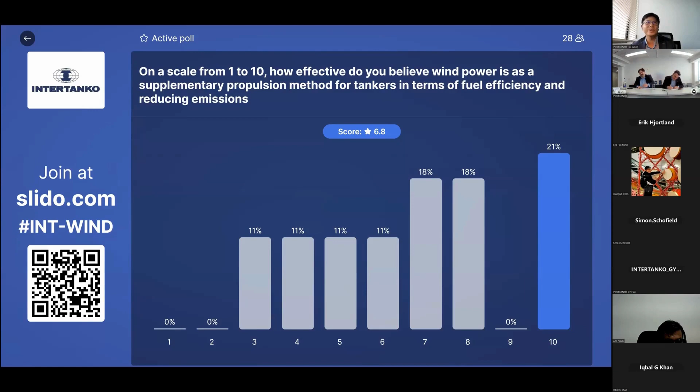Okay, can you hear me, Casey? Yes, I can hear you. I hope the rest of the audience can hear you as well. If not, I think they can sound out on the chat box.

Yeah, thanks. Fantastic. Thank you very much. And some interesting survey questions and answers there. I'm actually going to link those maybe with a couple of the slides later in my presentation.

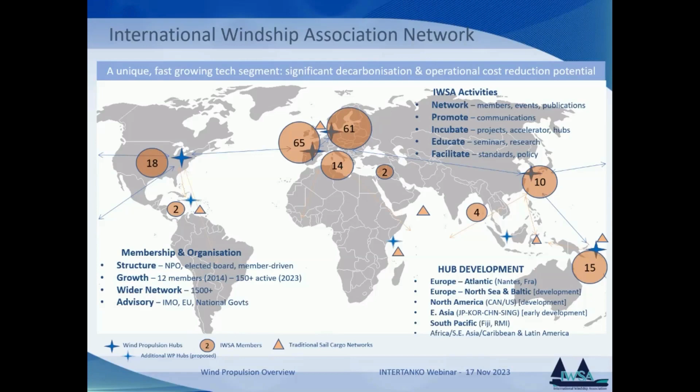We have a very active hub in France. We've just announced a hub in the Pacific as well, based on the Marshall Islands. And we've got developments also in North America and in Asia.

Very quickly, what does wind power deliver? What are we actually talking about here? Well, as an energy source, we're talking about zero emissions. That means obviously with wind, you don't need to mine it, refine it, transport it, store it, or bunker it. It's zero emissions delivered to the point of use on the vessel at a zero cost for the lifetime, not just of the vessel, but of the system itself.

Now, of course, the wind propulsion technology itself is not free. There are costs involved there. But I've put a few zeros here: zero development time. What that really means is we have 13 companies with their systems in the market now. Some of them are more developed with 5 to 10 installations.

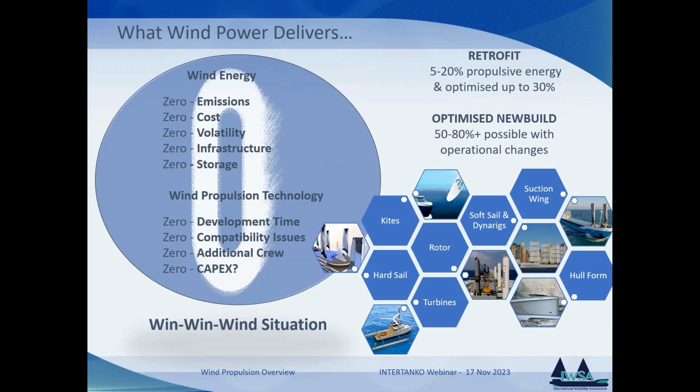And then we have hull forms where the actual hull is being designed as a giant wing itself, which is a very exciting development, and turbines, which can generate electricity but also deliver some thrust as well.

Now, our approach, and we'll hear more from other speakers about this, is to look at the whole energy system as a pie chart with five segments, each around 20%. Wind delivers 20% across the fleet. Then there's the activity of the vessel, operational changes, optimization of voyages, etc. Then the vessel itself, optimizing it, so air lubrication, integrating the EMS, etc. Each of those segments could deliver up to 20% or more, potentially more.

And then filling the fourth segment with the eco-fuels we hear so much about. And then a fifth segment, which could be any combination of those. But moving away from a fuel-centric approach, looking at it very much from an energy-centric approach.

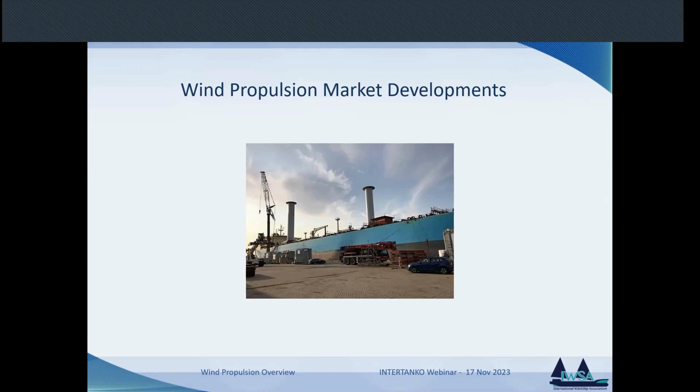Now, wind propulsion market developments. This is a Maersk tanker that was outfitted in 2018 with a couple of Flettner rotors. Currently, we have 31 installations on vessels, and as you'll see, the largest segments are ro-ro, bulk carrier, and general cargo.

There are 3 tankers in operation, but if we add wind-ready vessels, actually 6 chemical tankers were delivered this year, designated as wind-ready for Capital Ship Management in Greece. This is a growing trend, which I'll maybe touch on at the end.

Now, looking out to the end of this year, or probably the end of Q1 2024, we're looking at around 49 to 53 installations, and the 65 in brackets is the wind-ready aspect as well.

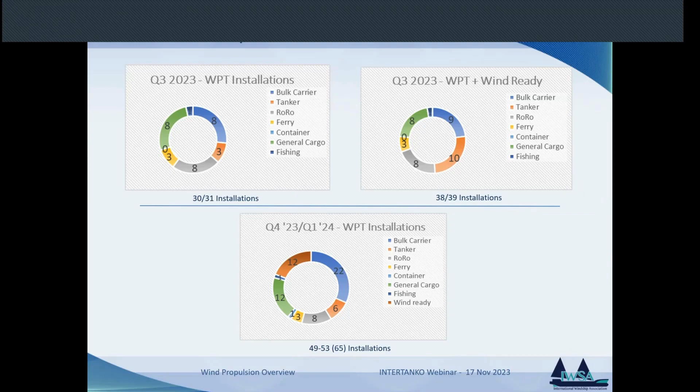So we started the year at 23. We will be doubling that this year, but actually there were 8 installations of wind propulsion last year. There are 24 plus this year. So we could say there's a 300% increase there.

This is a breakdown of what systems are on what types of ship. The pictures on the left, I'm not going to go through this because I don't have enough time, but 2 of those are Chinese tankers already installed. Others are simulations, but all of these are on order.

We actually have, I think, an order book for '24-'25 new builds of 11 tankers. Of course, retrofits are increasingly easier to do as we're moving along the learning curve, so from the announcement of an installation through to the actual installation is coming down to months rather than the best part of a year.

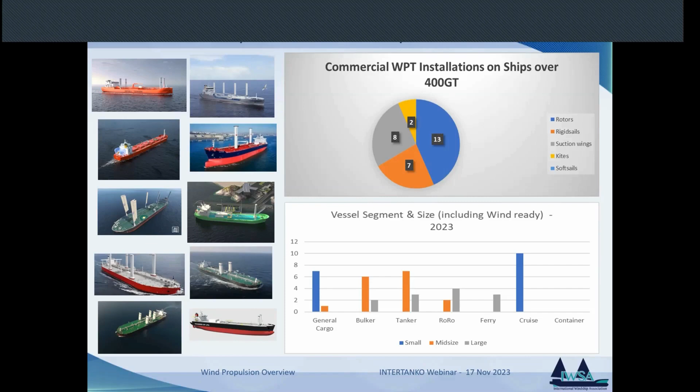And indeed, the foundation plate, if you're putting foundations on for, say, a Flettner rotor, it's a couple of weeks of work, but the actual installation, the last one I saw was 5 hours. So a ferry came in, had the installation put on, and 5 hours later she was back out to sea, fully loaded, with the rotor in operation.

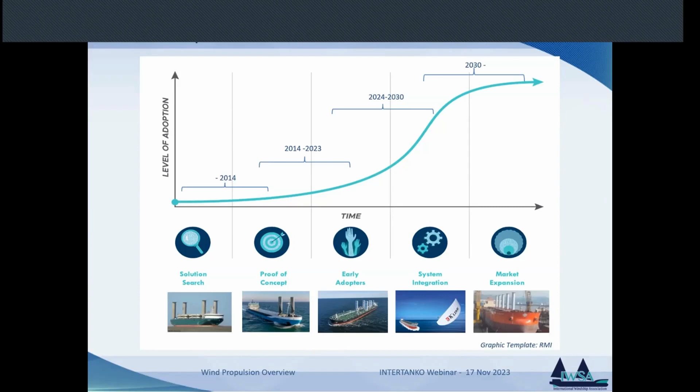This is just touching on where we are in the development curve. I think everybody's seen these kind of S-curves around innovation. We're pretty much in that area of early adopters, but moving towards more system integration, where we're getting a lot more development, a lot more installations. Feedback from those demonstrator vessels is now helping us integrate those systems into the ships.

Now, this ship, just to give you a quick heads up, is a ro-ro launched earlier this year with four wing sails. She's delivering the Ariane rocket parts from France over to French Guiana.

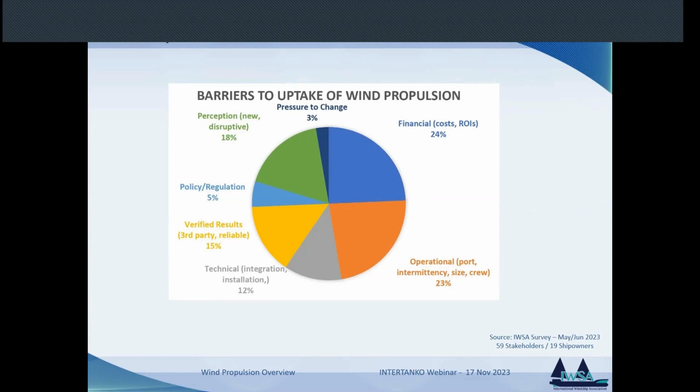Some barriers to uptake - I think this probably reflects some of the results we saw from your survey at the beginning. The financial issue, ROIs, costs, etc., obviously bottom line issues, but also operational aspects, including the intermittency of wind. Indeed, that's being challenged, and we'll hear a lot more about that from other speakers around wind routing, etc. But also the crew safety issues as well.

Market forecast - just coming to the last few slides. Just to give you an idea, this is the policy pathway, and the 3 flags are the indicative checkpoints passed in MEPC 80, and then the final net zero around 2050 or so. Now, none of the policy instruments is actually strong enough to decarbonize by itself, but collectively they're creating a lot of pressure on the industry, as I'm sure you're all aware. Collectively, this says we have to go towards zero emissions, and move far quicker than we are now.

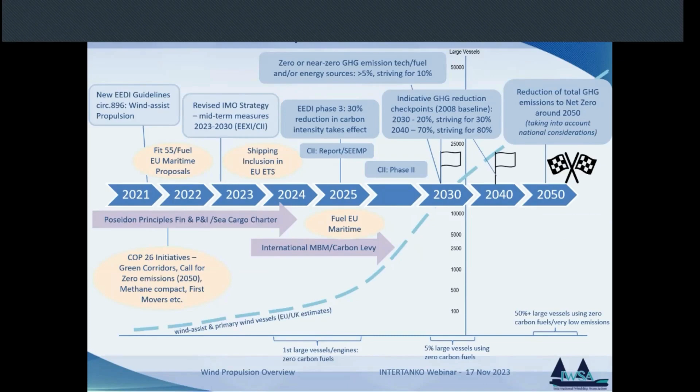Of course, wind propulsion is a zero emissions source, so whatever else you're deciding, you can use wind. The dotted line through the middle is a combination of forecasts made by the EU in 2017, followed up by the UK government in 2019. The EU estimated up to 10,700 installations, primarily looking at bulkers, tankers, and container ships. We think that's quite conservative because Ro-Ro's and general cargo weren't included. The UK government then took that out to 2050 and estimated between 40 to 45% of the global fleet would have some form of wind on board.

Finally, just a very quick look at the trends - it's always a bit of a chicken and egg situation. The trends develop as we get more wind propulsion systems on ships, but we need the trends to be developing to get more propulsion systems on the ships. Wind routing, which I've mentioned already, is increasingly sophisticated - for maintaining your ETAs, you can plug into these systems. If you want to maintain your ETA, what is your best route? If you want to maybe reduce your ETA, maybe by 20%, you can get far more substantial amounts of wind power for the ship. These are based on 50, 60 years of meteorological data, increasingly accurate.

For optimization, we're looking at things like satellite forecasting, sensors on all of the systems. Even LiDAR is being investigated, which is used on wind turbines, to map out about 20 kilometers away from the ship, what is the shape of the wind coming in. So these are ways to optimize, and there's going to be a lot more development there.

Scaling production - a number of our members are already moving production over to China. We've got scaling going on in Europe as well, and I think we're over 1,000 units per year capacity across the entire association. But for smaller units, that's easier to build - larger units are going to take more time. I mentioned wind ready, I think I've mentioned containerized - actually, there'll be a chem ship. Chem ship will have 2 containerized wind systems installed on one of their ships at the end of this year.

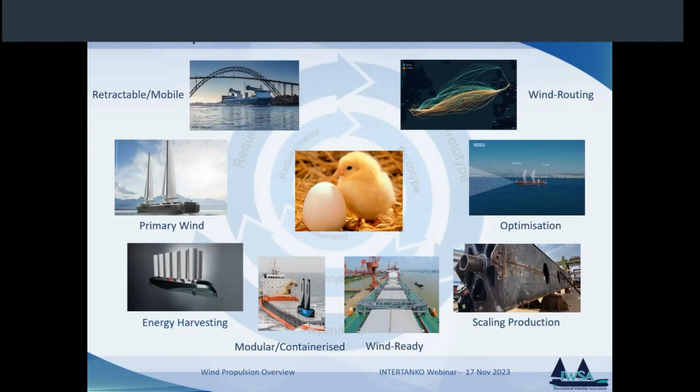So we're starting to look at a new paradigm of actually generating not just the fuel you need on the ship, but also a cargo. And that really starts to unlock some interesting business models. You'll see on the right side, that should be in operation.

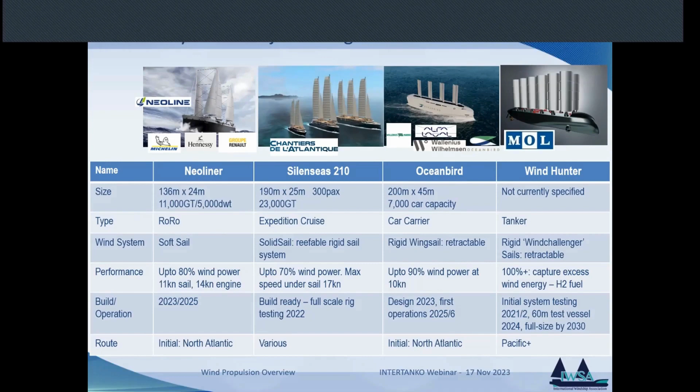That one, the full-size one, by 2030, hopefully earlier. But there are a number of other primary wind vessels in design. The one on the left, the Neoliner, is already in production in Turkey, and the other two are coming online 2025-26. This is my final slide.

We like to call this a win-win-win situation. All of the companies listed here, and I could have probably introduced another 3 or 4 slides, all of them are involved with wind propulsion projects, either installations, testing, certification, or actually some of them are even producing their own systems themselves. So thank you very much.

Thank you, Gavin, for bringing us through a very good introduction on the landscape of how wind power assist technologies have evolved and been applied, and what's to come. I think without further ado, we will have Mr. Frederick Gerhardt of Rise Maritime to bring us through a tanker technology overview.

Thanks. Yes, thanks very much for introducing me. Can you hear me, Casey? Yes, I can hear you. I think the audience can as well.

Okay, good. Gavin mentioned that the number of wind installations will explode over the coming year. So explosions are also the topic of my talk today. This is what I'll try to go into a little bit here.

Since a few years back, we also have a wind propulsion lab, so we've worked a lot on wind powered ships. Now wind power - did we not hear this before, and did it not end this way, like shown here in the picture? But as Gavin explained, we're talking about modern systems. We're not talking about square riggers and the canvas sails of the Temeraire.

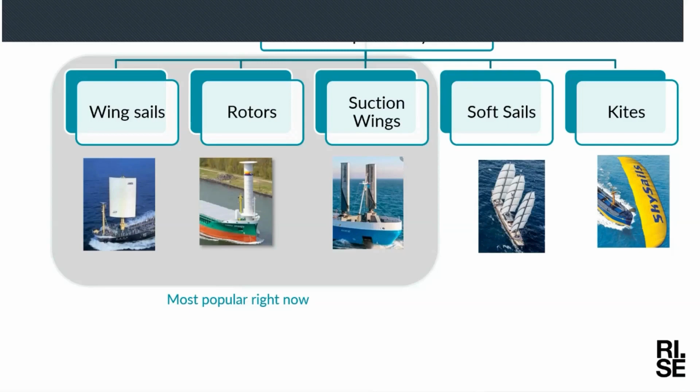We're talking about basically 7 categories, of which I've taken the 5 more important ones here. The 3 main categories with most installations right now are the wing sails, the hard sails, the rotors, and the suction wings. I thought I'd give you a 30-second lecture in fluid dynamics because they all work the same way - they are wings producing lift and drag, like wings on an aircraft.

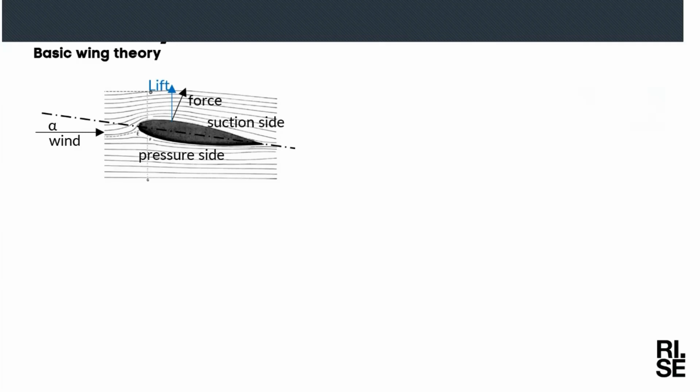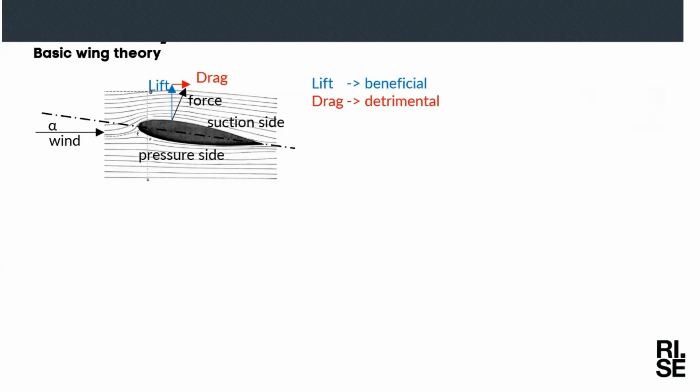So they produce lift, that's a good thing. They produce drag in the direction of the wind, which you don't want. If you increase the angle of attack - that is the angle between the direction of the incoming wind and the wing - then you start producing more and more lift until you finally reach something called stall. This is where the flow can't follow the shape of the airfoil anymore, it starts to separate, and this is something you don't want, because after this your beneficial lift will just drop.

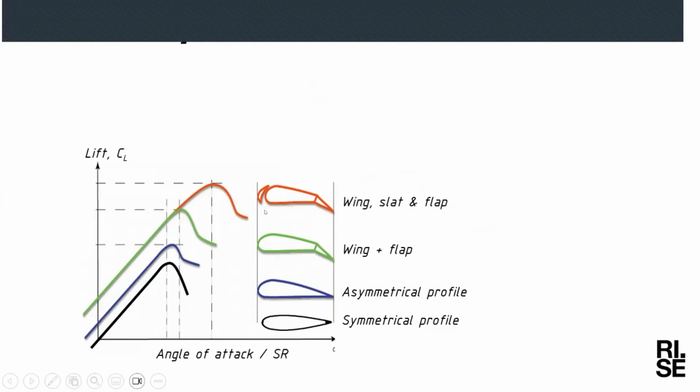So the big question is, how can you avoid this? How can you delay the stall as far as possible so that you produce as much beneficial lift as you can? There are a few techniques around this. Flaps are used on every commercial aircraft - if you look out the window just before landing, you see flaps and slats extended, and they give you a little bit of extra lift. But there are other, more advanced techniques - this here is called boundary layer suction.

So you've got a very fat profile in the beginning, and normally the flow would separate somewhere around here because it can't follow the curvature. The boundary layer, that's the innermost layer of fluid, can't cling to the wall anymore. It doesn't follow the contour, and then it separates.

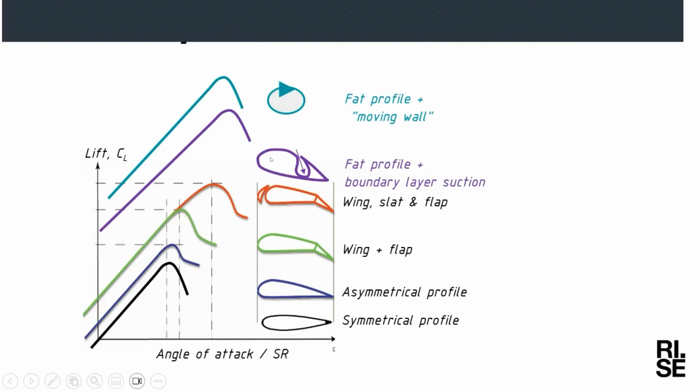But if you just suck off this boundary layer, your streamlines will look nice again, and you get a lot of extra lift. There's other ideas. Instead of sucking off the boundary layer, you could help a little bit by rotating the wall, and you see where this is going.

This is basically the physical principle behind those three most common systems. Something to mention here is that the two top systems, the purple one and the moving wall rotor thing, are active systems, so they require energy to operate. This is something you need to keep in mind when you do the overall energy balance of your systems.

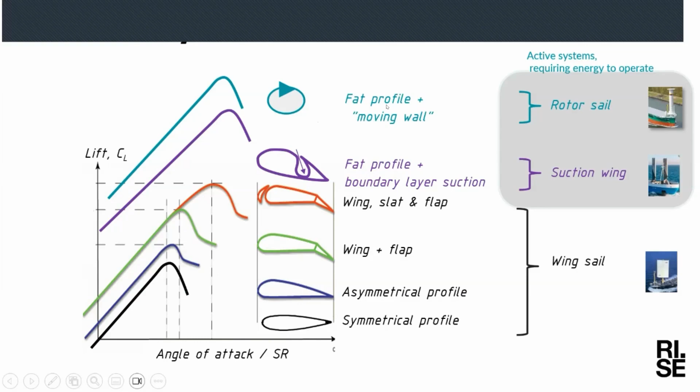Now you will probably ask yourself which of these systems is best. The problem is there's no simple answer. It depends on a lot of factors, for example the routes, how close to the wind you want to sail, and a lot of other factors. You can consider all of them, and what it finally boils down to is really what system gives you the most bang for the buck, the best return on investment.

Talking of the benefits of the systems, the bang they can score in three areas really: wind propulsion can help you with rules, with EEDI, EEXI compliance, with the ETS, CII, IMO regulations. So that's rules, but they can also produce real savings in terms of fuel, money, or CO2. Another area that's becoming increasingly important is consumer expectations. It's kind of an image question - it's really nice to be able to provide green transport.

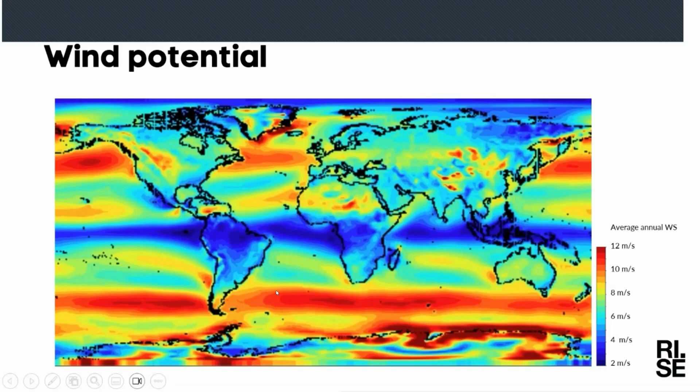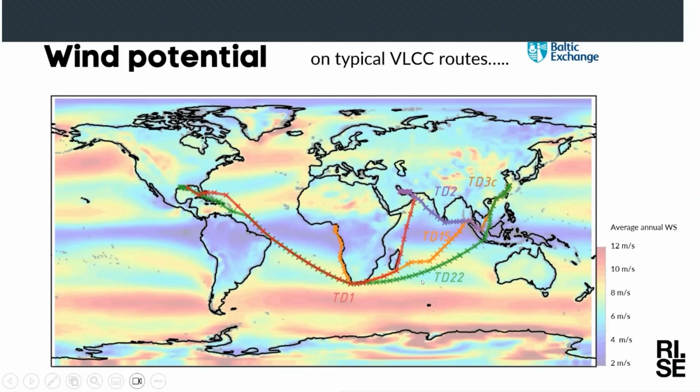If we talk about tankers, and maybe above all oil tankers, VLCCs, which I'm looking into in a minute, you see a concern - maybe it's not so much of a problem, but some of the routes, like Persian Gulf to Singapore for example, are in not very good areas, so the wind speed potential is not very high. There are other routes like Gulf of Mexico to China which actually have a large potential. But you need to look at this case by case, and then tankers, VLCCs, operate on the spot market, which adds complexity to those predictions.

This is a case study which I wanted to present to you today. It's a European Union funded Horizon project called Optiwise, where we as RISE work together with Euronav and the sail provider. We looked at the energy saving potential of installing wing sails on a VLCC.

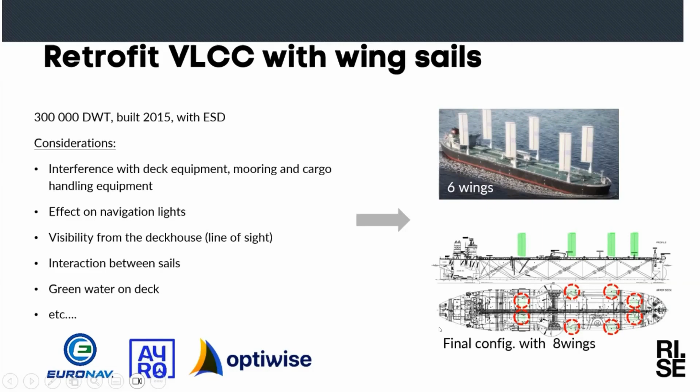So we sat down together with Euronav, looked at installations, how many wings we could stick onto a VLCC taking into account interference with deck equipment, all the pipings, cranes, and so on. In the end, we figured out that we could really stick up to 8 wing sails on a ship like this. So we took this further and looked at energy saving potential and did a few routing studies.

We also looked at how it influences the EEXI. This is already a very effective ship, built in 2015 I think, with energy saving devices and so on, so it does comply with the EEXI as it is, as a motor ship. If you would stick the 8 wing sails on, you could also comply with EEDI phase 3. So that's really a good saving here. If this was a new ship and you would equip it with those 8 wings, you would also fulfill the phase 3 requirements.

As you all know, EEXI is a bit of a paper tiger. It's a dead number which ends up in a technical file somewhere and no one looks at it again.

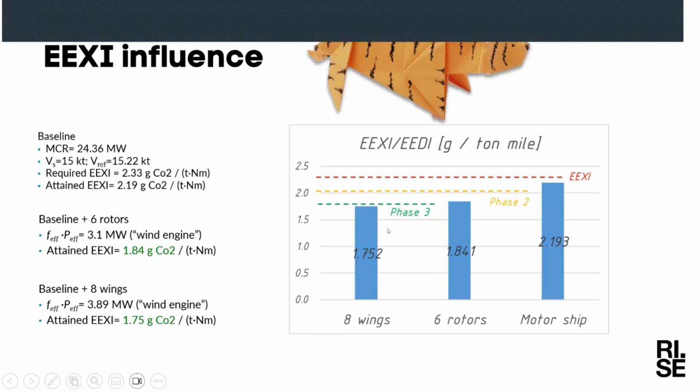If you mix those numbers for those routes together with operational data from real ships, and recreate a year of operations, you'll find that you can extend your CII rating by about 2.5 years or so by installing those wind propulsion devices.

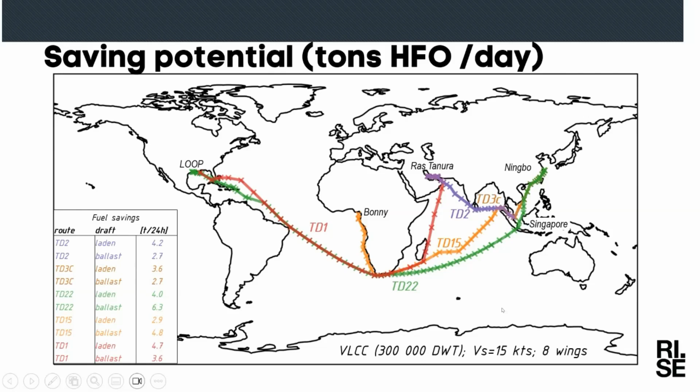So this was the benefits, the bang. The question is what about the buck? At what price do the benefits come? There's obviously CapEx and OpEx, but there's also other aspects I just wanted to shortly touch upon.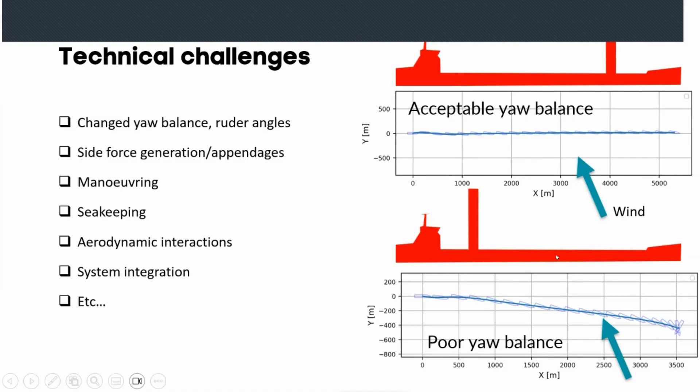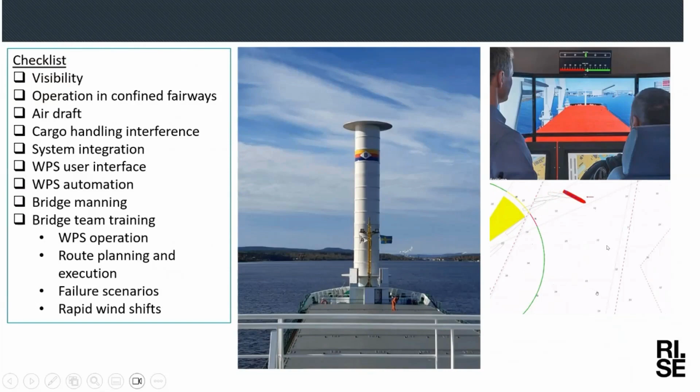There's also a whole lot of operational challenges, visibility issues, like in this picture from a sea trial. The pilots didn't like this because they couldn't see their marks in a channel. Here's a simulation of operations like a tacking maneuver in a confined fairway, so those things can be analyzed before, also for example in a simulator.

And here's a few more pictures. Sorry, can you go back again?

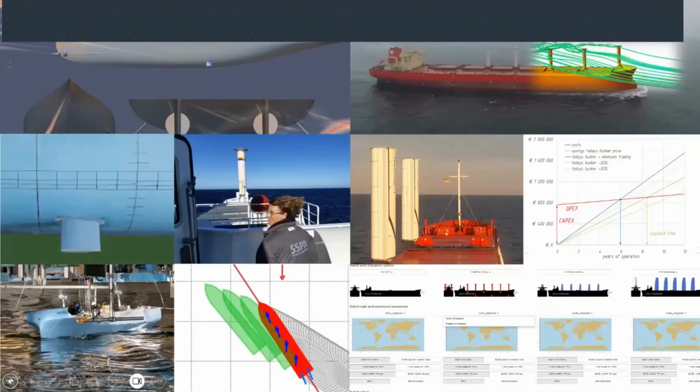Before I hand over to the next speaker, I mentioned side force generation. The sails produce side forces. You somehow need to counterbalance this, above all on more powerful installations. This is a CFD study or a tank test of a little fin like a dagger board.

There's seakeeping aspects, this is interesting. This is a sea trial of a real device, to basically confirm savings in real life.

And then the last bit, the picture down the bottom right, is our methodology to help people like Eric from Odfjell, who will be the next speaker. It's a side-by-side comparison of competing wind propulsion technologies on the same ship. You've got your baseline tanker, and you can equip it with Flettner rotors or small or big wing sails, and run it along different routes. In the end, you get the fuel savings predicted by the same system. This is what we call a level playing field to compare all the devices.

And this is actually what we've used for Odfjell at the beginning of the year. Before they decided to install suction wings on a tanker, they came to us and we ran it through this system, looked at a whole lot of other devices and device placement, number of devices, device sizes, and so on. In the end, they decided on this configuration. I think we will hear more from Eric in a minute. With this, thanks very much.

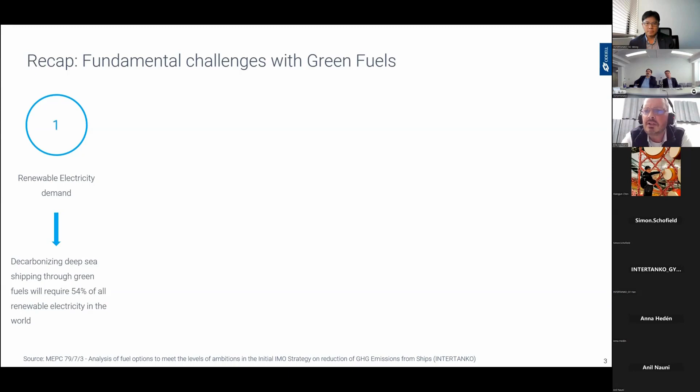The second challenge is that it's just a sad yet mathematical fact that there is nothing we have looked into that gives so little greenhouse gas reduction potential per kilowatt hour of renewable electricity input as producing fuel for aviation and shipping.

The primary reason for this is the energy losses in the process. Where you have 1 kilowatt hour of renewable electricity, you have to produce green hydrogen in order to produce the other alternative fuels, whether ammonia or methanol. In that process, you lose 30% of the energy. Then when you convert it from hydrogen to green methanol or green ammonia, you lose another 30%. Then you put it on the ship, where you lose 40, 50, 60% of the energy in the engine itself. This is why we come so badly out of this.

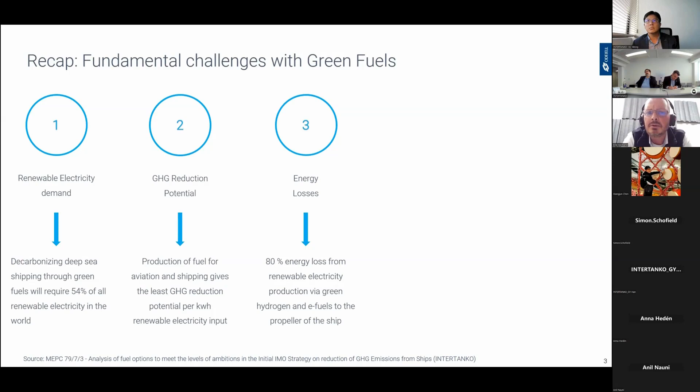We are looking at an 80% energy loss from renewable electricity until the energy hits the propeller of the ship, to put it that way.

The fourth fundamental challenge with green fuels is carbon leakage. If we are to produce green fuels for deep sea shipping, taking 54% of the renewable electricity in the world to do that, then that electricity demand has to be replaced elsewhere. Otherwise the lights will go off somewhere, right? The question is, what will it be replaced by? We know that 61% of the global electricity grid is currently non-renewable, and that number has been unchanged the last couple of years.

This means that when we create this energy or electricity demand, it will be replaced basically by this grid, meaning that emissions from shipping will actually just go up. But we will not see it, because we have transferred it into another sector outside of shipping. The emission ratio from shipping of all emissions in the world will go up between 2 to 8 times according to our analysis, due to these carbon leakages or replacement emissions.

The fifth fundamental challenge with green fuels is cost premium. If we look at electricity costs over the last 15 years in the EU, producing green ammonia or green methanol will cost approximately $2,500 to $3,000 per ton. You need 2 tons to compensate for 1 ton of VLSFO, meaning we are looking at a VLSFO-corrected equivalent price of around $6,000 per ton.

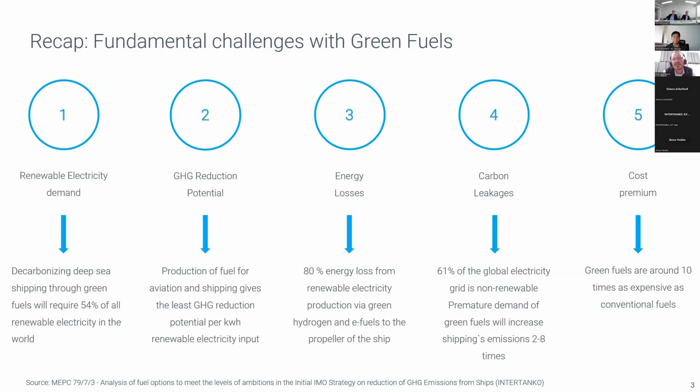In fact, our position at this stage is that we believe the best holistic contribution for us as ship owners in the energy transition phase is not to change to green fuels yet, because from our perspective this is not a race to zero, it's a marathon to zero. We have to work on energy efficiency until sufficient renewable electricity is available, because then it will be our turn. It makes sense.

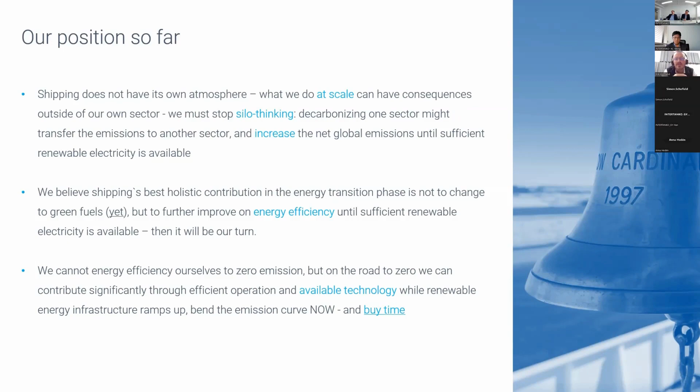Now, of course, we cannot energy efficiency ourselves to zero emission. That is clear. But as I write there, on the road to zero, we can definitely contribute significantly through efficient operation and utilizing available technology while renewable energy infrastructure ramps up, because then we can bend the emission curve, and we can do it now. And by that, we can buy ourselves time. Because if it is one thing we need, that is actually time, unfortunately.

Because if you look at the infrastructure required to build these 5,500 terawatt hours of renewable electricity, you get almost flabbergasted out of it. Because our demand, if we are to decarbonize to green fuels, equals 771 nuclear plants, or almost 600,000 onshore wind turbines, 3 megawatt turbines, or 12 billion solar panels. I mean, in the world today, there exist approximately 2 billion solar panels. We need 12 only for shipping, or for deep sea shipping.

Or the last alternative that we have looked into, at least, is approximately 140,000 offshore wind turbines. So the infrastructure here is just enormous. This is not going to be solved within the next couple of years, that is for sure.

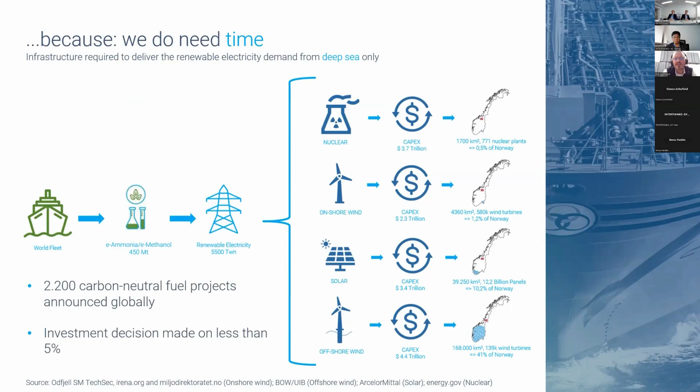Add to this picture that there are 2,200 carbon neutral fuel projects announced globally according to DNV. But we also know that less than 5% of those have had an investment decision made. Now, it is in this context you have to see the reason why Odfjell is so focused on energy efficiency.

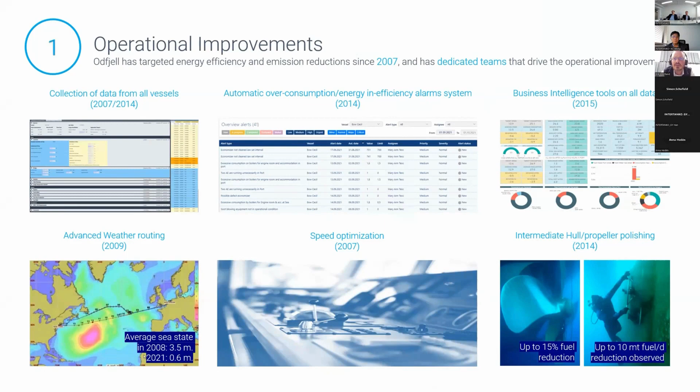Now, most of you have probably seen Odfjell show these kind of technologies and operational improvements earlier. I will not go into detail on that. I just want to bring it forward because I have an important message on this one.

The message is that even though this does not say zero, or it does not say 100%, well, they actually work. And I think it's fascinating to attend conferences and follow public debate where we discuss this huge infrastructure development required. We discuss these multi-billion-dollar technology projects. We talk about hydrogen, ammonia, methanol, and that's fine. We have to discuss those items because ultimately they are the ones to bring us to zero.

But what I'm trying to say is that let's not forget that in my hand now I hold something that costs $5 and it can reduce your emissions by 15%. I hope you can see that. And I think that is the main message here. We of course have to look into what brings us to zero, but let's not forget those more simple stuff that incrementally help us along the way.

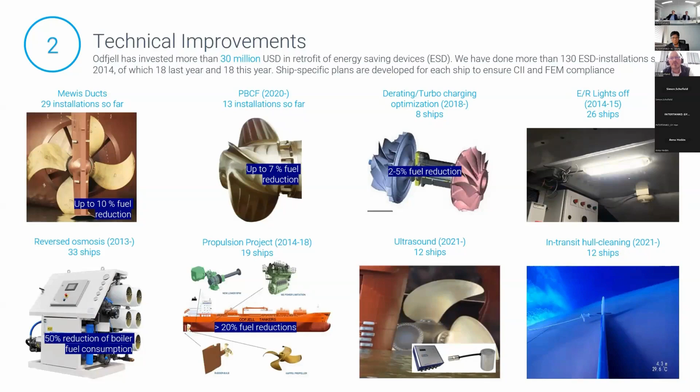And that is exactly what I think we have demonstrated in Odfjell, where we now have reduced or improved the carbon intensity by 53% compared to the average IMO baseline for our 2008 fleet. So it works.

And then you can of course say that, yeah, but it is not zero. 50% is not good enough. We are looking for 100. And of course, if you look on energy efficiency and you look vessel by vessel, that is correct. As I also said earlier, that we cannot energy efficiency ourselves to zero.

But I want to challenge this statement a little bit. Because if you look at our AER in 2008, and we see that today we have, through energy efficiency, both operational, technical measures, fleet renewal, we have achieved this AER. What if we had not done anything on energy efficiency, but instead we had just phased in a number of new ships with zero emission capability so that the fleet AER had ended up at the same level as we have done today? What would that mean?

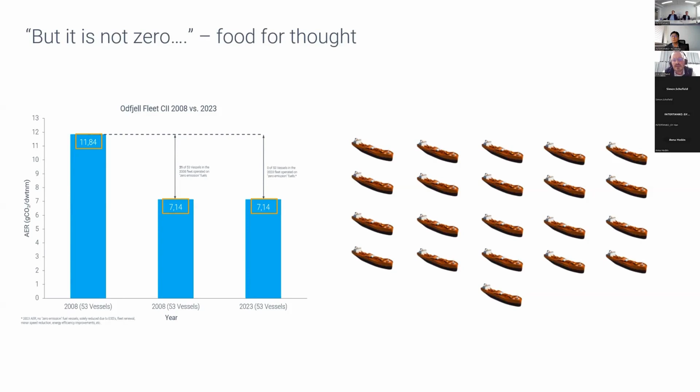And it was quite surprising for us to see when we did this very simple calculation that what we have done on energy efficiency actually gives the same result as 21 zero-emission vessels would have done. And that is the reason why I say that I want to challenge the notion that energy efficiency cannot bring it to zero. Because 21 out of 53 vessels, zero-emission equivalent in terms of energy efficiency, that is quite a decent number.

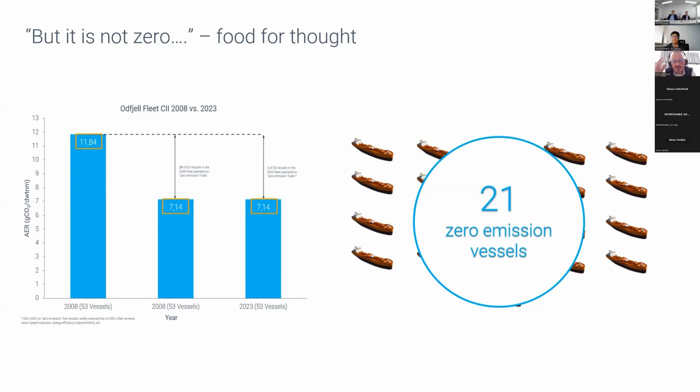And it just tells us what we as a sector can achieve by utilizing existing technology and do something meaningful with regards to emission reductions today, instead of just talking about the future and the fuels somewhere down the line that will solve everything for us. I think it's at least for us, a wake-up call.

And I think this is exactly what DNV also has now brought to the table in the latest maritime forecast, where you can see that they say that in order to achieve what we need to achieve by 2050, almost 40% of that must be done through energy efficiency, through a reduced energy demand.

But I think also it's important to have a look at what they say about 2030, because if you follow the debate today, and this race to zero mentality, we are talking about something that shall bring us to zero by 2030. And I don't think that is realistic at all. And you can see it also here from DNV that they predict that 64% of our goals by 2030 needs to be taken through energy efficiency.

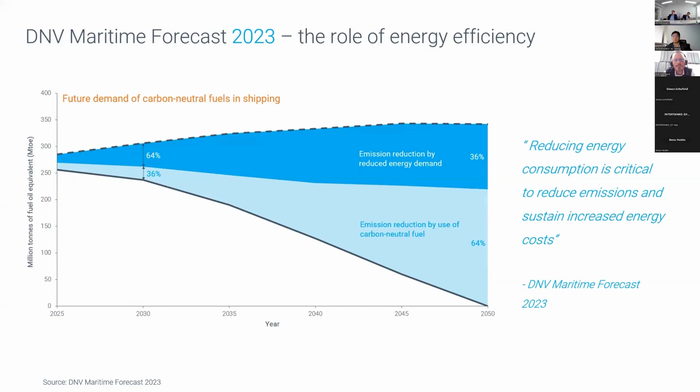When we talk about energy efficiency, everything we have done in Odfjell - we have installed more than 130 different project installations. The toolkit is actually starting to run empty, so we need to scale this up now.

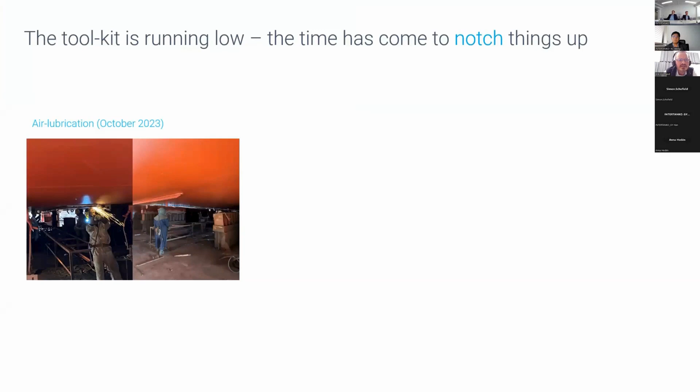The first of these new technologies we call novel technologies is the air lubrication project, which we have recently installed on one of our ships just a couple of weeks ago. Here are some pictures of the installation. The idea is that we have installed 3 air release bands on the flat bottom of the ship. We have a couple of compressors producing air, and we release 80 million air bubbles under the flat bottom every minute, creating an air cushion that the ship will sail through.

The idea is, of course, to reduce the friction or resistance through water. That was installed a couple of weeks ago, and we are now shortly starting the trials across the Pacific, which will be a very interesting trial, to put it mildly. We expect a minimum 7% net saving from this, but it could also go higher.

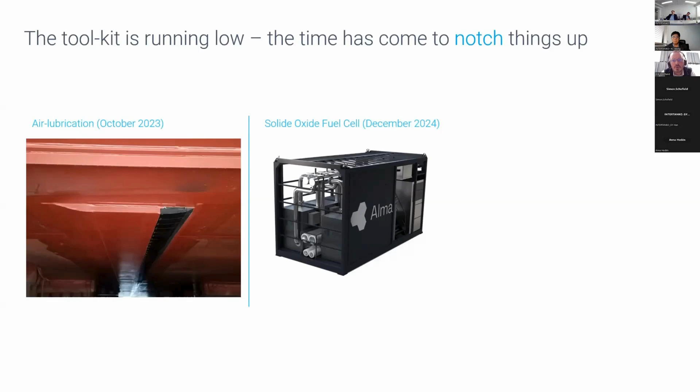We are also involved in this solid oxide fuel cell project. This will be the world's first fuel flexible, zero emission capable solid oxide fuel cell, with the potential of reducing consumption by 50% compared to a combustion engine. This is also very interesting for us. This is a project we have been involved in for the last 5 years, and we plan to install and test it in December next year. On the same vessel, we also plan to put the suction sails.

The plan is to retrofit 4 sails on one of our Hudong class vessels. This is a 40,000 tonner. The sails are 22 meters tall, 4.5 meters in diameter, and they weigh 35 tons each.

Because of the height, we have decided to cap them at the same height as the vessel itself, so we don't need to worry about lowering them down or anything like that, because that adds a lot of complexity and cost. That's the reason why we have them at 22 meters.

The technology here - you can see these 2 items on top, which are 2 fans. They suck air through holes vertically down on the sail, and as they do that, they create this over-under pressure situation that gives a net positive lift for the vessel. The potential here from our perspective is pretty big.

As an average expectation, we estimate around 10% saving every day at sea in worldwide trade. But I think that number is in many ways irrelevant, because that's how we normally look at energy saving device technology - you get the saving every day. This is not the case for sails. On some voyages we will have 0, on other voyages we will have significant savings, that's for sure. So this average number is not that interesting, at least from my perspective.

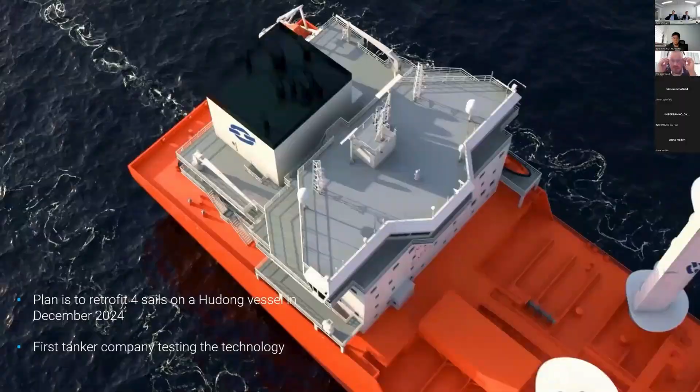What's good about this suction sail technology is that it has a very high lifting coefficient, first and foremost. Second, it is fully autonomous. The third argument for this kind of technology is that if you're in an area where you don't wish the sail effects - dense traffic, or very rough weather, whatever - you just push a button to stop the fans, and by that you also stop the entire sail effect. Then it will just create a drag the same way as all other structures on the vessel. So I think this is a very nice technology, at least for our vessels and our trade.

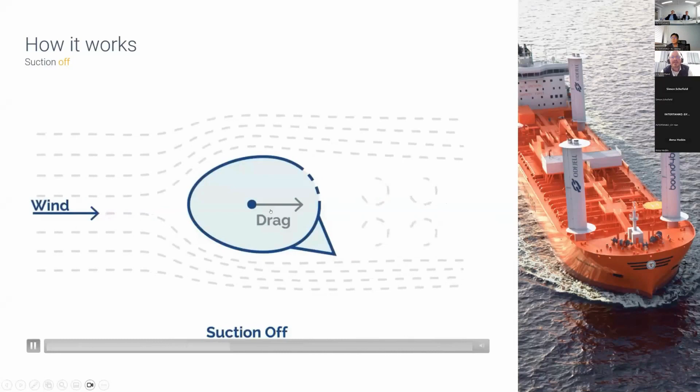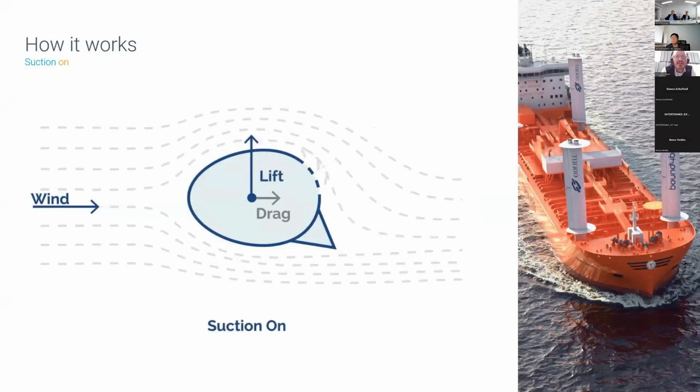Here you can see how it works, where the wind comes in and hits the sails. On the aft side, you see this stalling that was mentioned by our previous speaker, basically just creating a drag. When we start the fans, you get this over and under pressure situation, and you get a rather significant lift from the sails.

Now, let's put this into context with the Fuel EU Maritime regulation that will start January 1st, 2025. This is really interesting, because as probably all of you know, we need to improve the greenhouse gas intensity in the energy used by the ships.

From 91.2 to 89.3 from 2025 to 2030, so 2% down. Now, if the relationship between the force from your sails and the power from the engines is more than 0.15, then you get a reward factor that you put into the Fuel EU Maritime energy balance equation, which you can see here is quite nasty. You get a coefficient here, so that is for 5%.

Now that doesn't sound like much, but if you look at this, when we calculate the energy balance of this class of vessels, we see that in 2025, they will have a deficit of 126 ton CO2 equivalents that we normally would have to offset through biofuel or any other fuel with lower GHG intensity. But when we install these sails, we calculate that we will not get a deficit of 126 ton CO2 equivalents, but we will actually get a surplus of 197.

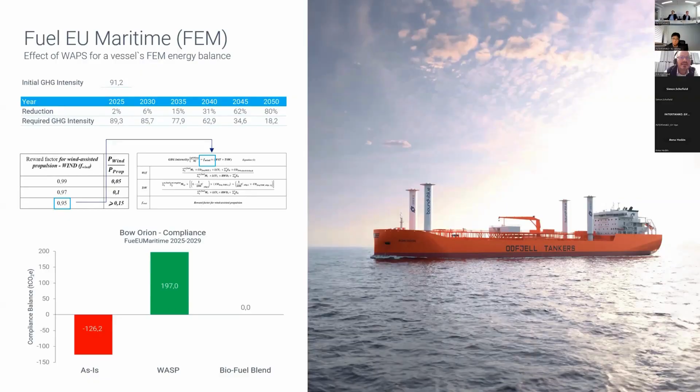So just to summarize this, shipping does not have its own atmosphere, and I think it's important to continue to remind ourselves that what we do at scale can have consequences outside of our own sector. And this is why we have been so vocal on this silo thinking item. To decarbonize one sector can transfer the emissions to another sector, and it can also increase the net global emissions until sufficient renewable electricity is available.

This is the reason why we do not wish to push a shift to green fuels now, because we believe that the renewable electricity infrastructure is not ready for that. And that is the reason why we are so rigorously focused on energy efficiency, because that works, and at least it can bend the curve, and it can provide tangible emission reductions from day one through on-the-shelf and rather cheap, business sound installations.

But I think it's important to also emphasize that when you look at it on a fleet level, remember that the energy efficiency that we have done in Odfjell gives the same environmental effect as 21 zero-emission ships. And as I mentioned, to us at least, this was a wake-up call. And again, it was achieved through existing technology and without stress on renewable electricity. But it has also reduced our costs and increased our competitiveness. So this is a very good proposition.

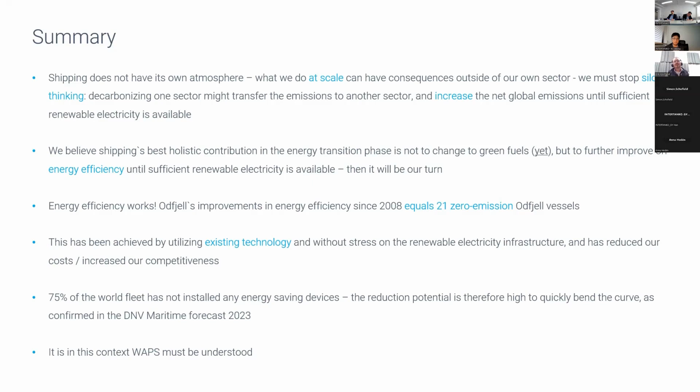Just to conclude on energy efficiency, it answers to all known greenhouse gas regulations, and WAPS, or Wind Assisted Propulsion System, is one of the very few energy efficiency toolkits that can offer two-digit reduction measures. If we look at the EEXI, for instance, which regulates the energy efficiency of the ship, you can improve your EEDI and EEXI by 15% through wind-assisted propulsion systems.

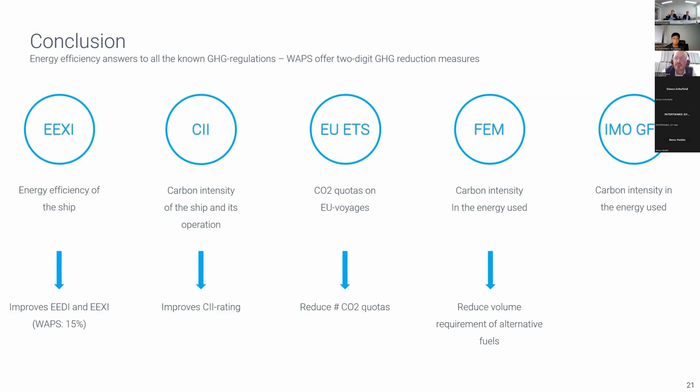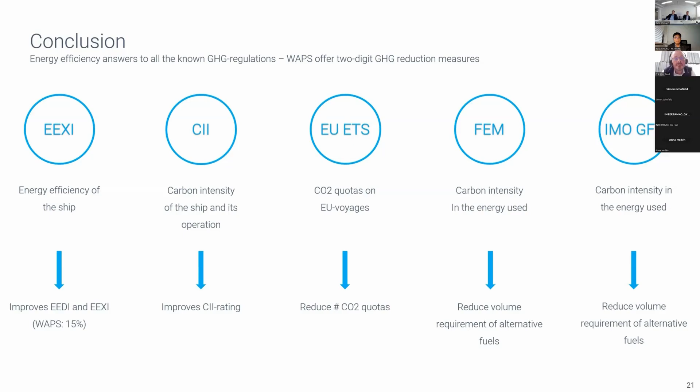It can improve your CII rating. It will reduce the number of CO2 quotas that you need to purchase within the EU ETS. It will also reduce the volume requirement of alternative fuels for fuel EU maritime compliance, and it will also reduce the alternative fuel volume requirement within the IMO GFS when that starts to happen. So I think this slide just concludes the beauty of energy efficiency and the wind-assisted propulsion system concept, because it ticks off basically all the boxes from our point of view. And by that, I think that concludes my presentation, and I say thank you for the attention.

Thank you, Eric. I think that was very insightful, especially on the rationale and thought processes, given that this is a long marathon in terms of the decarbonization journey. Odfjell is also one of the pioneer companies who started fleet performance monitoring with sensors installed throughout to monitor the effects of different improvements made.

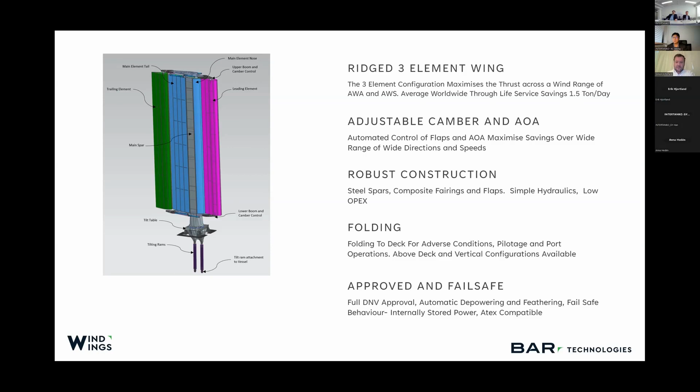There are a couple of exciting installations we've launched recently. The first is 2 wings on a Kamsarmax called Pyxis Ocean, which belongs to Mitsubishi Shipping and is chartered to Cargill. The second is a larger Newcastlemax, owned by Berge Bulk.

Since launching these wings, especially on the Pyxis Ocean, we've spent a lot of time gathering data and understanding the performance. We've had some of our staff doing long ocean voyages on the vessel to undertake in-service testing. I'll share a brief example of some data points we've recorded during the first voyages.

During one of these first voyages, from Singapore to Brazil, we undertook a number of tests. One obvious test on this wing is to do speed runs with the wing up, then fold them down and do runs with the wings down. That provides us with true back-to-back testing, assuming the wind conditions stay constant, which generally they do at sea in the time periods we're looking at.

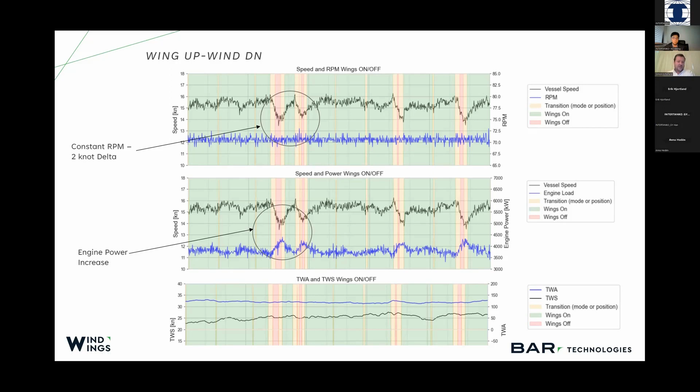So first thing that's obvious, if we keep engine RPM the same, and we put the wings up and then we put the wings down, we're seeing about a 2-knot delta in vessel speed. Associated with that 2-knot delta in vessel speed, you can see that the engine power increases as well. So not only are we decreasing speed when we drop the wings, we are increasing the engine loading.

We can then take that data and use that to check our models. And then from the models, we can verify via strain gauges the amount of thrust we're producing on the vessel. And we can effectively run back-to-back comparisons with and without wings, which allows us to do statistical analysis along a route. And here's some examples again of some savings,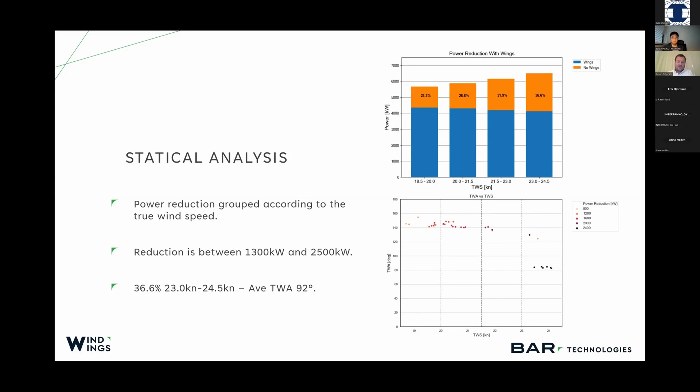We're seeing from 2 wings alone in kind of 23 to 24 knots of wind at 92 degrees true, so slightly forwards of the beam, savings of 36.6%. And that equates to a reduction of about 2,500 kilowatts of power.

When we extract some longer segments, there's a few examples here. There's a 24-hour segment here when each wing was saving 5.6 tons of fuel a day. So on that vessel, each of the vessel was saving over 11 tons of fuel per day.

And you can see that although the wind speeds are changing slightly and the wind directions are definitely changing, due to the flexibility of the 3 elements and the way the wing is automated and configured, our fuel savings are very high. So I said at the start that we look at a global average of 1.5 tons a day.

Obviously, if you're operating on a route where there's good wind conditions, the savings are an order of magnitude better than that. And it's important that when we're looking at wind technology, we look at the routes we're operating on and take that into account.

What is really, really promising is that the correlation between the predicted fuel savings and the actual fuel savings we're recording, and we're looking at through the back-to-back testing, are very, very well aligned. If anything, our predictions are slightly conservative, but this gives us good confidence that when we're looking at a new vessel or a retrofit and we're looking at specific routes, we should be able to very accurately simulate the amount of fuel we're going to save statistically, and also the payback periods and the business cases.

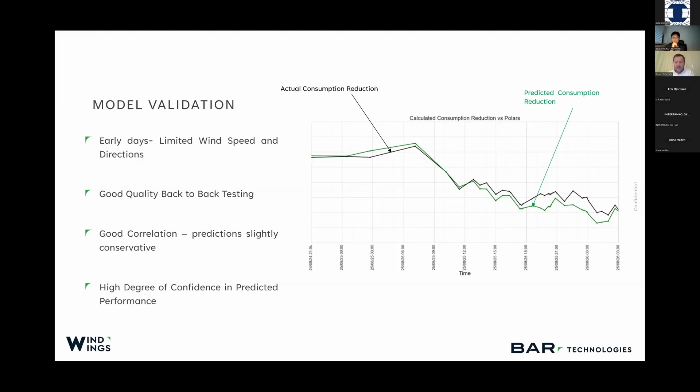And this vessel just came through the Bay of Biscay in some very, very bad weather, and we've got footage of waves breaking over the wings in these conditions, and they survived very, very well.

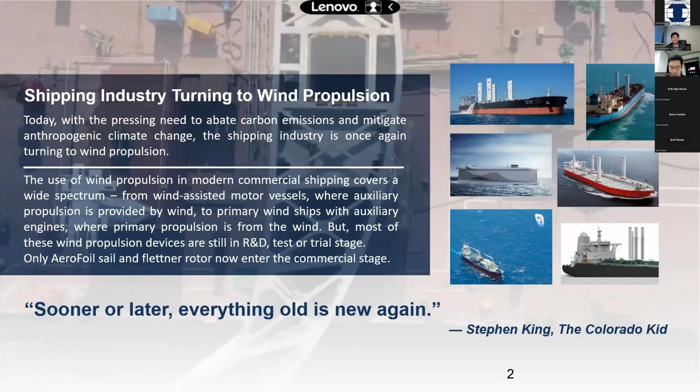Modern wind propulsion systems, such as aerofoils, differ from traditional dragging sails, similar to an airplane wing. The secret lies in the pressure difference due to the camber of the aerofoil surface. The leeward side always has a higher velocity than the windward side. Based on the Bernoulli effect, this high-speed flow results in reduced pressure, or suction, compared to the windward side. The components of lift and drag in the direction of travel help propel the ship forward.

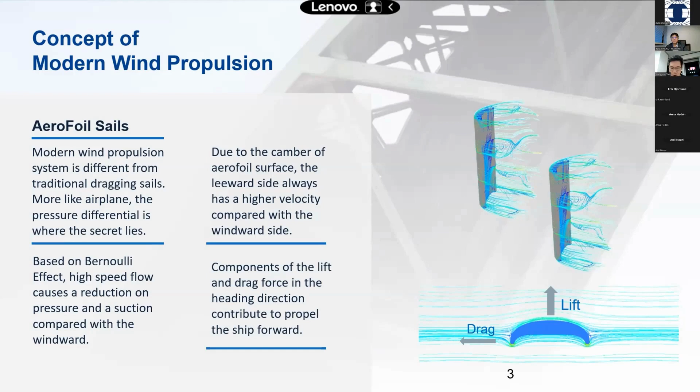The aerofoil sail concept comprises a steel support mast, an aerofoil surface, and a steel foundation. Mechanical components include the aerofoil surface, steel mast, steel foundation, slewing mechanism, and reefing mechanism. Both the mast and aerofoil surface consist of multi-section nested structures. The slewing mechanism consists of a slewing base, slewing support, driving motor, and pinion. The reefing mechanism is composed of a hydraulic cylinder and fixed pulley block.

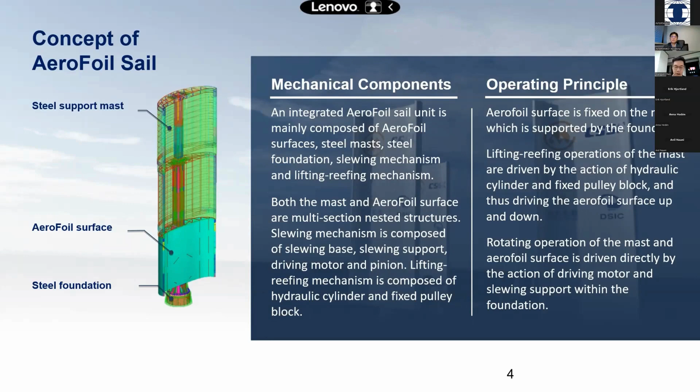The operating principle involves fixing the aerofoil surface on the mast, supported by the foundation. Lifting and reefing operations are driven by hydraulic cylinders and fixed pulley blocks to move the aerofoil surface up and down. Rotating operation of both the mast and aerofoil surface are directly driven by driving motors and slewing supports within the foundation.

The drives for lifting and reefing operations are powered by hydraulic cylinders and pulley blocks, while the rotating operation is driven by electrical hydraulic motors using the deck machine hydraulic unit as the power source. The support structure consists of a mast made from a hexagonal polygon steel structure and a foundation made from cylindrical steel structure. Ambient conditions include available wind conditions up to Beaufort Scale 8, survival conditions based on North Atlantic environment, at a probability level of once every 25 years, less than 55 meters per second. Operation relative wind angle ranges between 20 degrees to 340 degrees. Operational relative wind speed ranges between 0 to 25 meters per second, with a maximum thrust capacity of 503 kN.

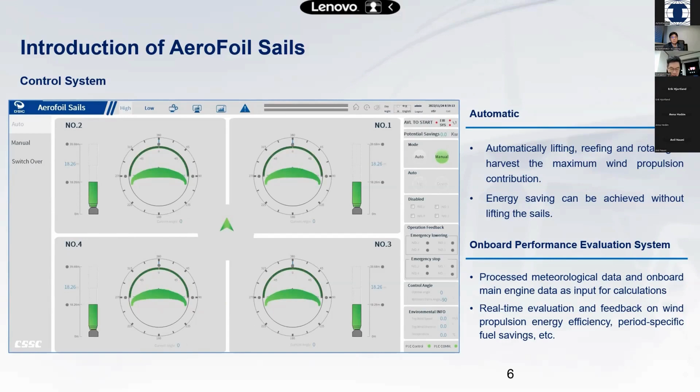The monitor system for lifting and reefing displays real-time values of oil temperature, P pipe pressure, and T pipe pressure. The monitor system for rotation displays the status of inverter, motor, lifting encoder, and rotary encoder. The monitor system for power self-checking displays the power status of each device.

The green line indicates normal operations, while the red line indicates a fault. The monitor system for communication displays the communication status of each device. Again, the green line indicates normal operations, while the red line indicates a fault.

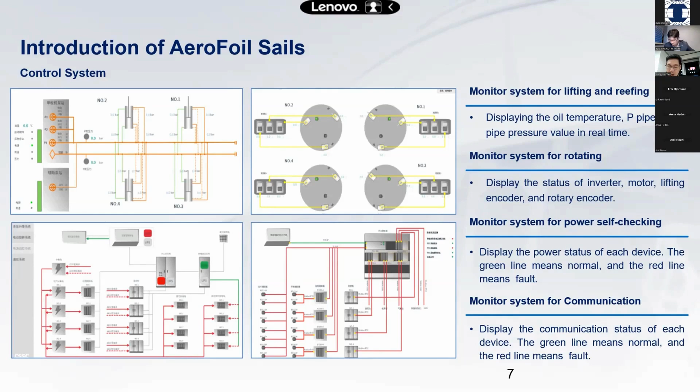The installation of aerofoil sails will impact the following aspects. First, ship stability: the center of gravity of the vessel will be raised since the sails will be located on the deck, resulting in an increase in wind-induced heeling moment due to aerodynamics. Second, radar visibility: the fully raised height of the sails will exceed that of the radar mast.

Third, the navigation and collision prevention equipment arrangement: the visibility of navigation signal lights may be affected by fully raised sails. Fourth, the anchoring, mooring, and towing equipment: there will be an increased projected area which may require more equipment and affect the design of anchoring, mooring, or towing equipment. Fifth, the firefighting system.

The blockage caused by sails may create a blind sector that cannot be reached by the firefighting system. Number six is vessel maneuverability. Based on previous installations, there is no notable impact on vessel handling. The retractable function and control system allow minimizing the force generated by sails.

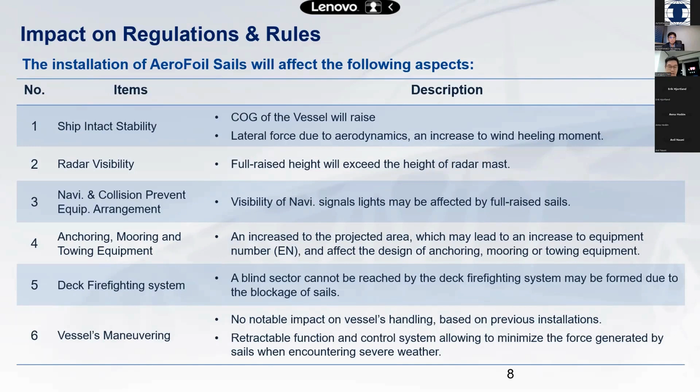During severe weather, the following interfaces should be integrated with the vessel system. One, the longitudinal strength: the installation of sails will change the weight distribution, which in turn will affect the hull structure. Two, deck reinforcement: additional loads on the vessel structure may require reinforcement to adjacent structures.

Three, arrangement for HPU to provide the power for lifting and reefing. The hydraulic oil tank is about 4 cubic meters. Four, power capacity: the power demand for lifting, reefing, and rotation is approximately 75 kilowatts. Five, additional...

Anemometer: checking wind speed and direction data, providing the original anemometer to determine the optimal rotation angle and ensure structural safety.

Six, signal required by control system. The control system collects multiple signals, such as wind direction, wind speed, draft speed, and main engine power, shaft power, and oil consumption, etc.

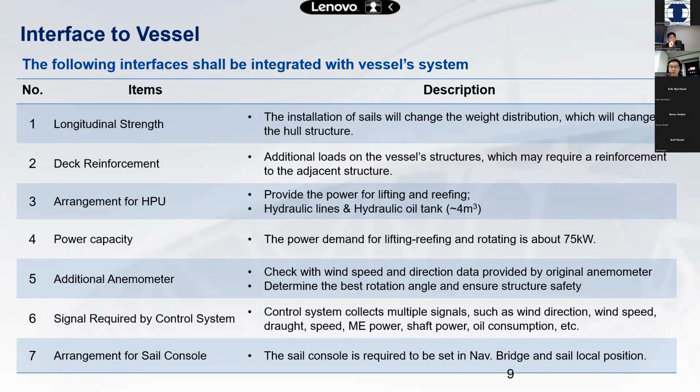New Vitality is the world's first aerofoil sail VLCC with one pair of aerofoil sails installed. These sails automatically lift, reef, and rotate to maximize wind-assisted propulsion contribution, resulting in a 3% contribution to attaining EEDI.

Fully loaded with a service speed of 12 knots and Beaufort scale 5, there is a minimum of 5% power saving for the main engine. In the case of wind at one of the most favorable wind directions, there is power saving of up to 16% and daily fuel saving of 5 tons.

New Eden is the second generation aerofoil sails VLCC with 2 pairs of aerofoil sails and carbon fiber reinforced plastic sail surface, as well as a smarter control system.

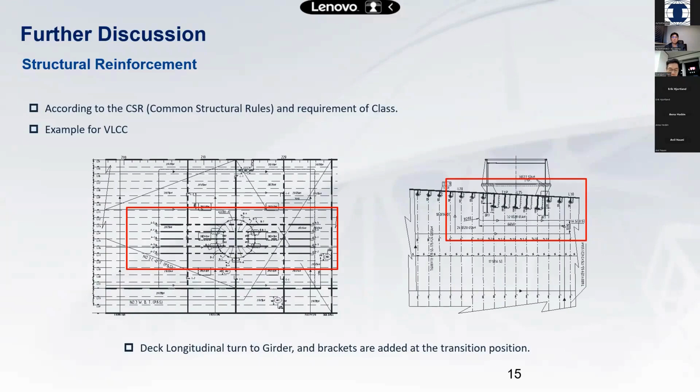Impact on stability: for large ships such as VLCC, there is significant redundancy in stability, and the installation of the sail propulsion system has little impact on stability. For small ships, stability can be improved by increasing the ballast water.

Impact on integration with navigation system and visibility. At present, the control system of the sail propulsion is not integrated with a navigation system. For large ships such as VLCC, blind spots for visibility can be avoided through reasonable layout. However, for small ships, blind spots for visibility should be exempted by the flag state. Radar blind spots can be solved by adding radar or CCTV.

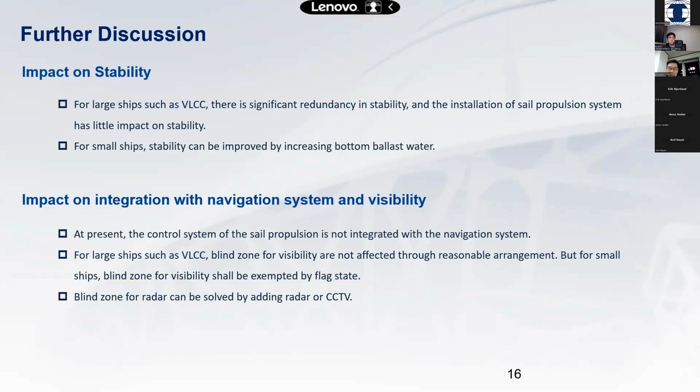Now, what new operation complexities could arise from the introduction of a new fitting? As an intelligent control system, the sail propulsion system does not require human intervention during normal operation. Human intervention is only necessary in emergency situations to control the sail propulsion. Prior to delivering the sail propulsion system, comprehensive training will be conducted for the crew on principles, controls, and alarms.

For maintenance, strategies are necessary to ensure reliability and performance. Being a wind-assisted system, the propulsion system requires regular maintenance for optimal performance. Therefore, the maintenance instructions for sail propulsion will be provided, including maintenance items and cycles for each subsystem. The operation manual also specifies requirements for maintenance, such as pre- and post-use checks.

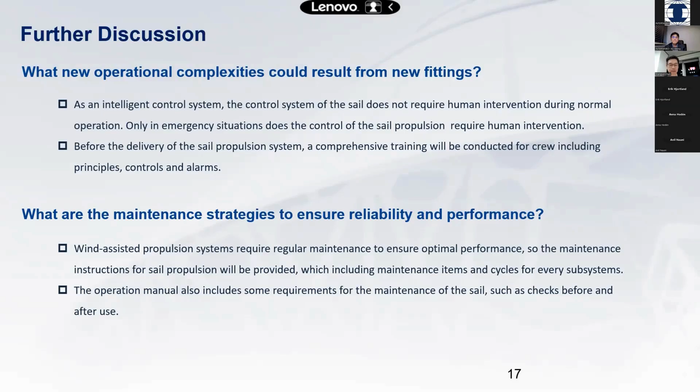Okay, the morning technical sharing on wind propulsion has come to an end. Thank you for your valuable time. If you have any questions, please don't hesitate to reach out to me via email after the meeting. I will be more than happy to help. Thank you again.

Thank you, Mr. Chen. Yes, I think that was very insightful, especially because it comes from real life experience. The first VLCC that CMES, or China Merchants Energy, put on water was in 2018.